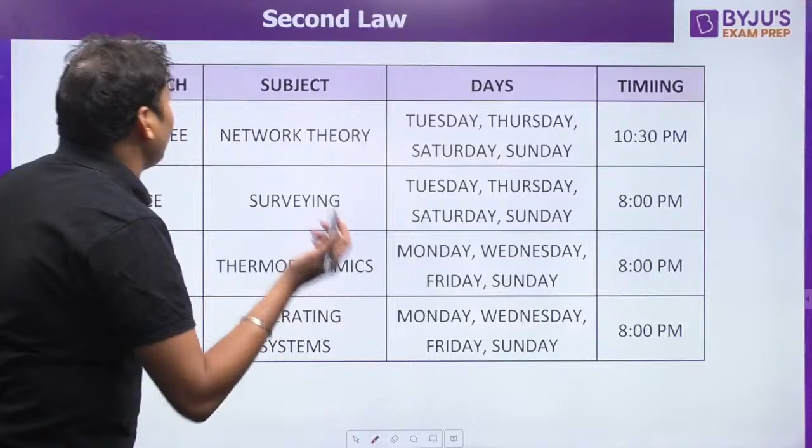All right. So this is our schedule for GATE 2023 aspirants. So for mechanical, the subject thermodynamics is going on, and every alternate day I am meeting live on the YouTube channel at 8 p.m. So next class will be on Wednesday and we will start talking about the entropy.

पूरा syllabus तो यहाँ पे नहीं हो पाएगा, but most of the important topics which are generally coming in GATE examination, these topics we will definitely cover here itself. So we will try to cover almost all the subjects, but in each and every subject we will not be able to provide you the complete syllabus because of the time constraint, but definitely we will be providing you the topics which are frequently asked in your GATE examination. All right.

This is the complete schedule for thermodynamics, basic and applied thermodynamics. So the basics and first law we have already covered. Second law, theoretical portion we have already covered. The next topic will be entropy, and then we will talk about the application of thermodynamics. These 4 topics are the most important in your thermodynamics syllabus, whether it be GATE, IES or other PSU examination like BARC, ISRO. You will find most of the questions coming from these topics only.

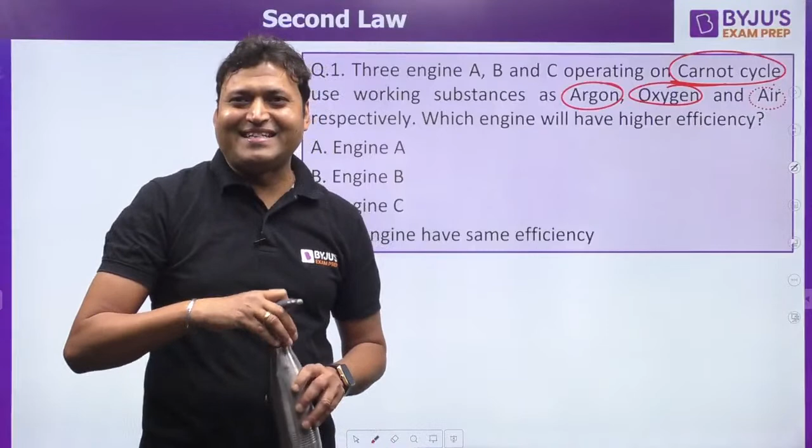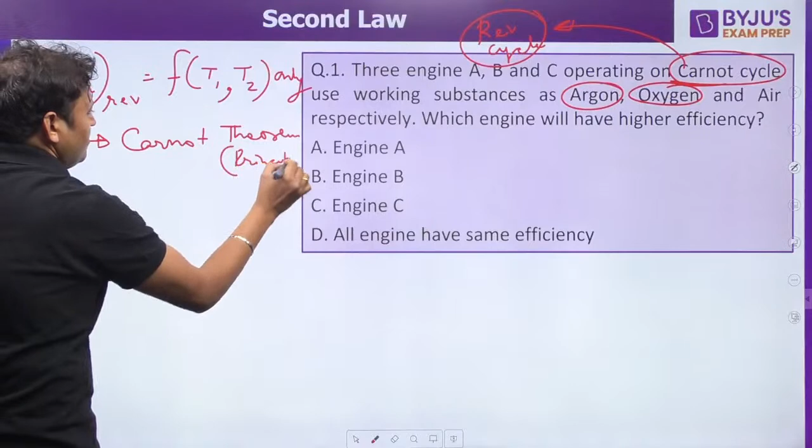Now look, Carnot cycle means a reversible cycle. Carnot is the most efficient reversible cycle. So when the engines are working on a reversible cycle, the thermal efficiency of the reversible cycle is a function of source and sink temperatures only. That is the Carnot theorem or Carnot principle. According to the Carnot principle, for a reversible cycle, thermal efficiency is not a function of the working fluid.

But the actual cycle, if it is an irreversible cycle, then the working fluid also comes into the picture for a real cycle. So the answer to the first question, Varun, it is not A, it is not B, it is not C. The thermal efficiency of all the reversible cycles will remain same, because all are reversible cycles.

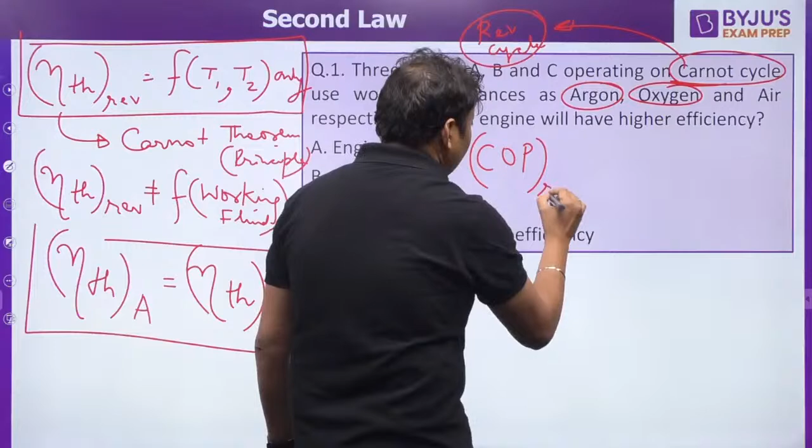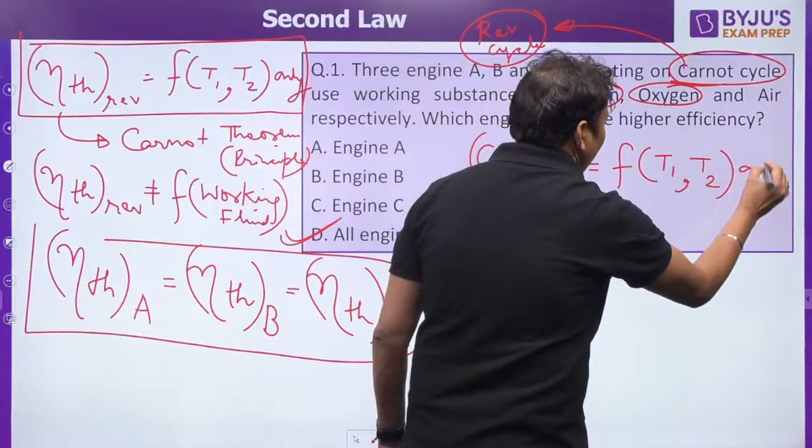And the same concept applies to COP for heat pump and refrigerator also. For a heat pump or a refrigerator, if the cycle is reversible, then COP also varies with the temperature only, whether it be COP or thermal efficiency. For a heat engine, we talk about thermal efficiency because it is a work producing device, and for heat pump and refrigerator, which are work consuming devices, we define COP to be the performance parameter. Is this clear to everyone? Answer to the first question is option D.

The next question, question number 2 on your screen. Read the question and try to solve it. Again, Carnot cycle. Whenever the word Carnot or reverse Carnot, Carnot means reversible. Carnot cycle or reverse Carnot cycle, they are completely reversible cycles. So the Carnot cycle is having an efficiency of 0.75. One more thing, do you know? The efficiency of the Carnot cycle, that means the reversible cycle, is given as 0.75 if the temperature of the high temperature reservoir, that is the source.

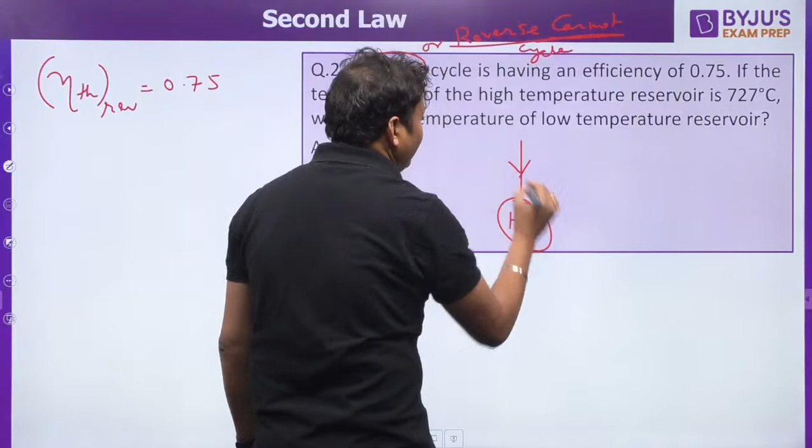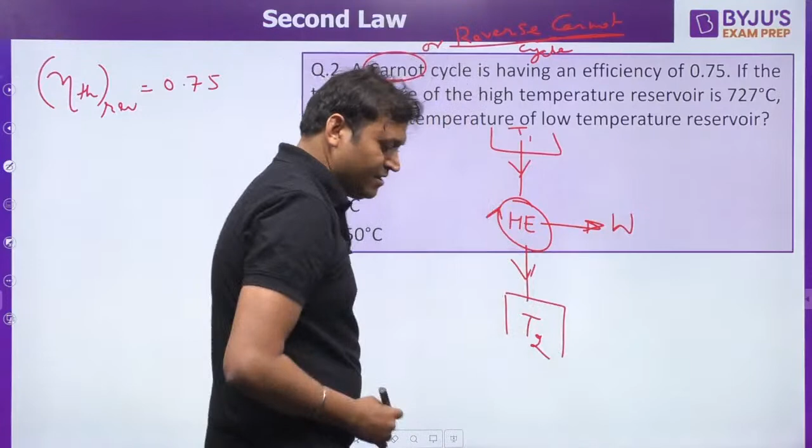How can the heat engine cycle be drawn? That is the heat engine. Here is the high temperature source, and there is a low temperature sink, and it is producing work. Clockwise cycle is the heat engine cycle. So the high temperature reservoir is the source, and the low temperature reservoir is the sink, Q1, Q2 and W. That is how we have drawn the heat engine cycle in yesterday's session. So what is the answer to question number 2? I want everyone to give me the answer.

So thermal efficiency is actually net work output upon heat input. Total heat input is Q1, work output is W, and from the first law of thermodynamics, we can say Q1 is equal to W plus Q2. So we can say W is equal to Q1 minus Q2. That can also be written as Q1 minus Q2 upon Q1, or we can write it as 1 minus Q2 by Q1. And this is the expression for thermal efficiency for all cycles, reversible as well as irreversible.

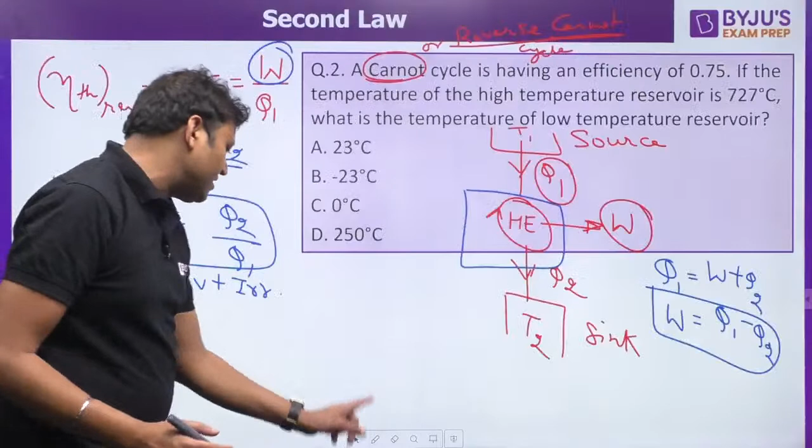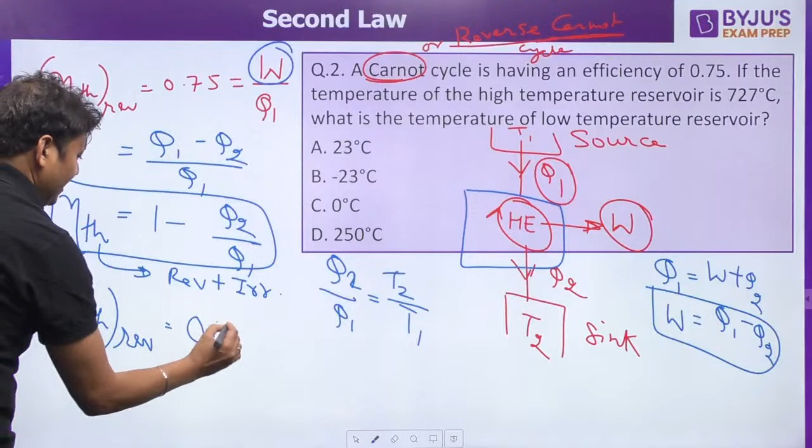But for a reversible cycle, one more concept we have discussed. If it is a reversible cycle, Q2 by Q1 is equal to T2 by T1. So for a reversible cycle, thermal efficiency is given as 0.75. That can be written as T1 minus T2 upon T1. From here, we can find out the temperature of the low temperature reservoir or sink.

The word sink could have also been used. Low temperature reservoir is the sink here, and high temperature reservoir is the source. What is the answer?

Now, one more important thing you should take care of. T1 and T2 must be absolute temperatures. What is absolute temperature? Absolute temperature means the temperature must be in Kelvin. Whenever we talk about the difference of temperature, it does not matter whether you calculate the difference in Kelvin or Celsius.

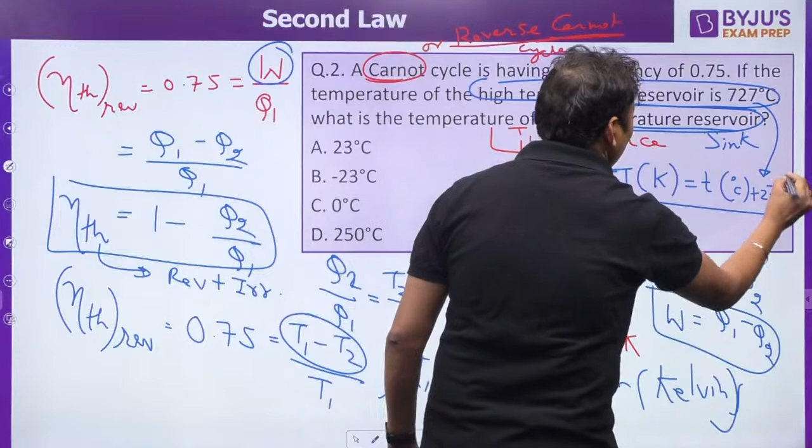The question is to find out T2, the low temperature. So T1 has to be taken in Kelvin. How to convert? Temperature in Kelvin is temperature in degrees Celsius plus 273. If you want to convert degree Celsius temperature into Kelvin, you should add 273. So T1 will be equal to 727 plus 273, that is equal to 1000 Kelvin.

And you can find out: 0.75 is equal to 1 minus T2 by T1, that is 1000. T2 you will get in Kelvin, and to convert it into degree Celsius, temperature in degree Celsius is equal to the temperature in Kelvin minus 273. That is how you will get the answer. What is the correct answer?

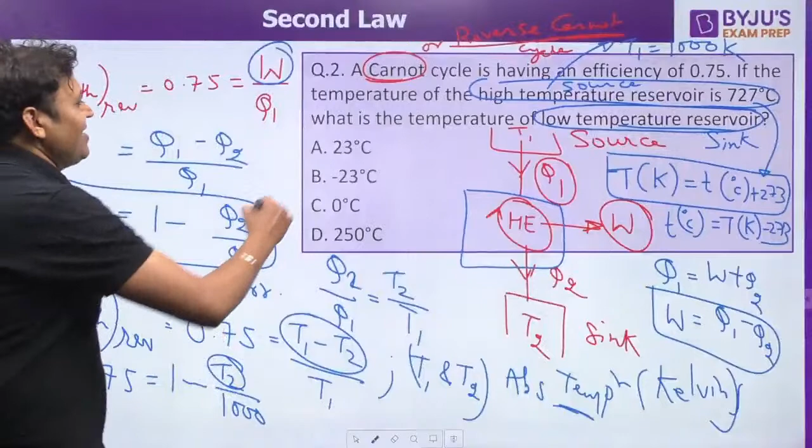The correct answer is option B. Yes, great. Is this clear to everyone? The next question for you guys.

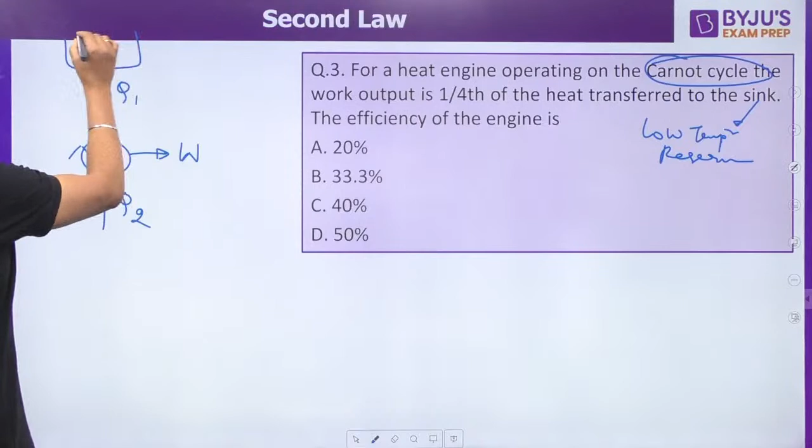For a heat engine operating on the Carnot cycle, the work output is 1/4 of the heat transferred to the sink. Sink is the low temperature reservoir. So if we draw the Carnot cycle, this is Q1, heat rejected is Q2, and the work output is W. This is the heat engine cycle. High temperature reservoir is the source, low temperature reservoir is the sink.

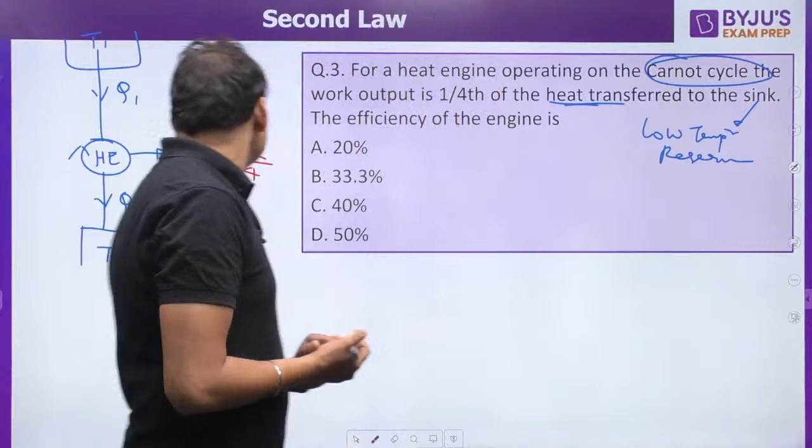So the work output is 1/4 of the heat transferred to the sink. This is the statement. So W is equal to Q2 by 4, isn't it? It is not Q1 by 4. And what is Q1? From the first law of thermodynamics, Q1 will be equal to W plus Q2. That is the energy conservation law for the system: energy in is equal to energy out, because it is a thermodynamic cycle. So Q1 will be equal to Q2 by 4 plus Q2, that is 5 by 4 Q2.

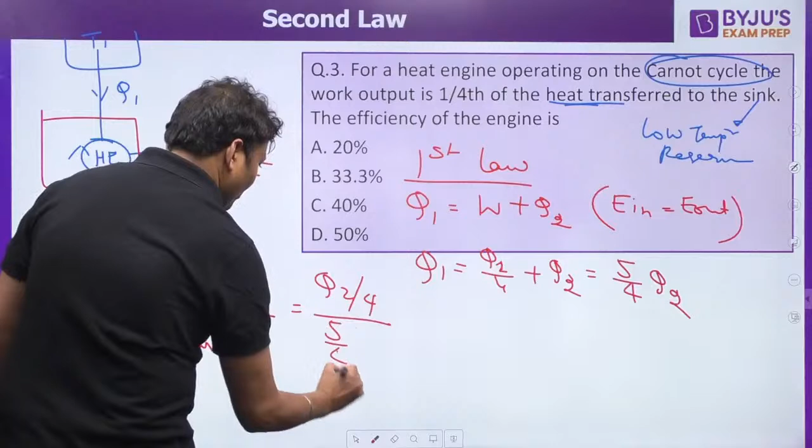Put the value. The thermal efficiency, whether it is a reversible or irreversible cycle, is given by the net work output upon total heat input. So W is Q2 by 4 and Q1 is equal to 5 by 4 Q2. So it will be 1 by 5, that is 20%. A is the right answer.

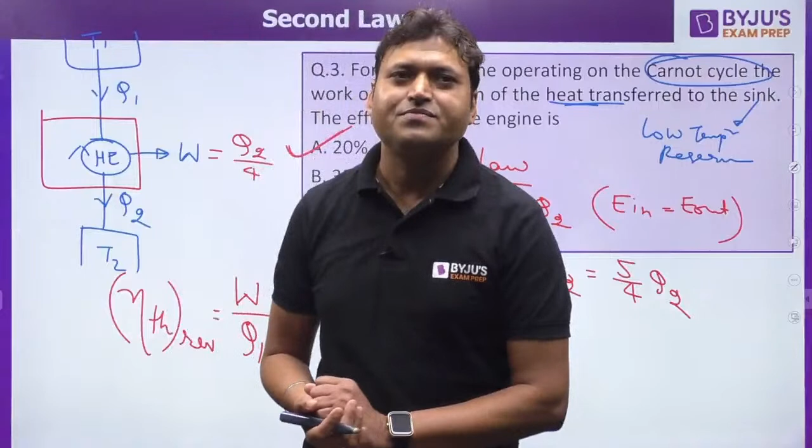Yes. Others, Ashish, yes. Others have not responded except Sagnik. Yes, Ashish. Hi, Abhishek. What's up?

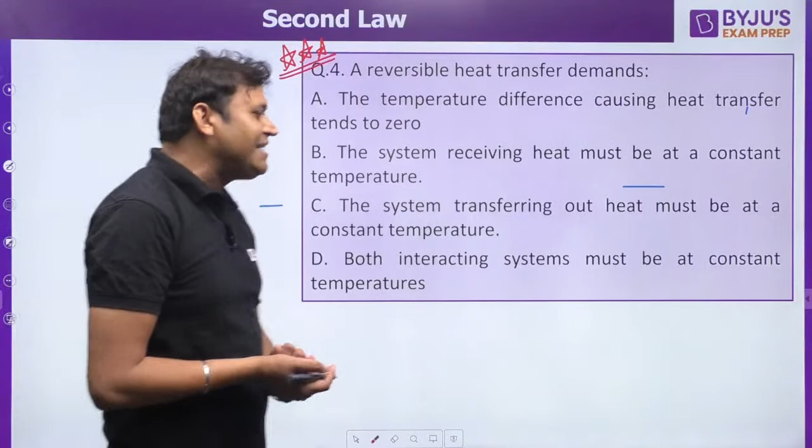Let us move to the next one. Question number 4. This is a very beautiful and important question, on the basic concept, whether you are clear with the basic understanding or not. Can you let me know the answer to this one? A reversible heat transfer demands. Do you know that the heat transfer process is an irreversible process? Heat transfer is irreversible.

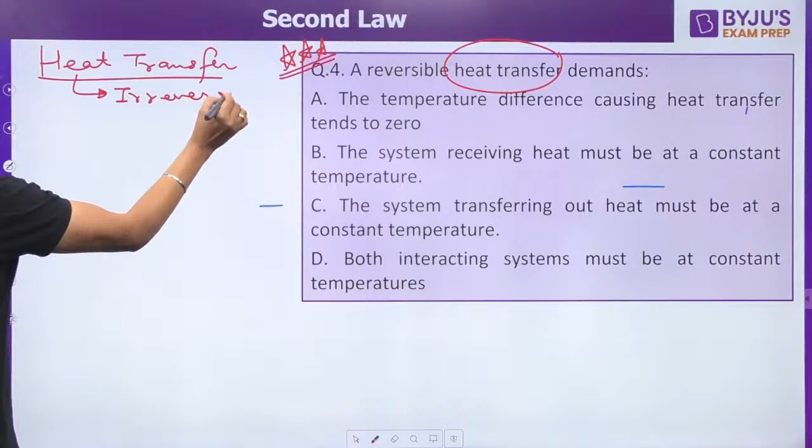Because why is heat transfer irreversible? Because heat always flows from high temperature to low temperature without any external work. If T1 is greater than T2, the direction of heat flow will be from 1 to 2. And if we want the heat to flow from low temperature to high temperature, we need to do external work.

If we want the heat to flow from low temperature to high temperature, then we are supposed to do some external work. Then external work needs to be done. That is why the process is not a reversible process. But in our Carnot cycle, the heat transfer is a reversible process. How does the heat transfer become a reversible process?

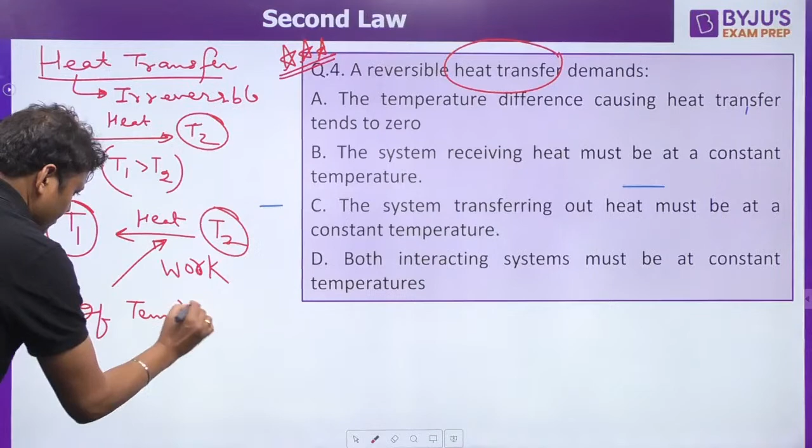If the temperature difference is infinitesimally small, or the temperature gradient is infinitely small, then the heat transfer becomes a reversible process.

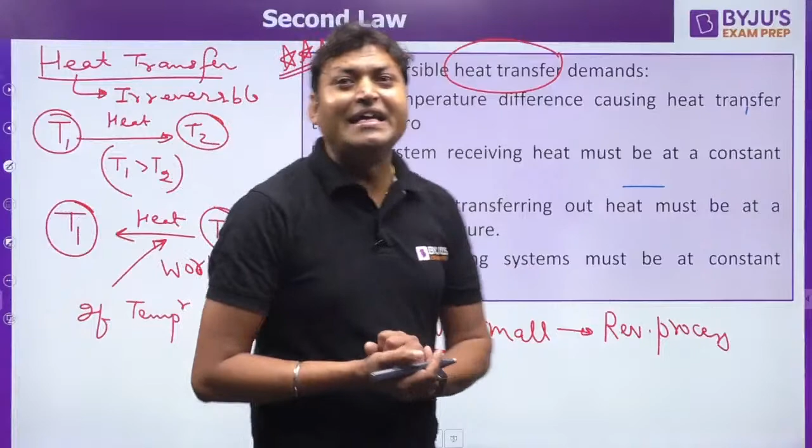For example, in a heater or in a geyser, a water heater. If we talk about a water heater, there is water and there is a heating coil. The temperature of the heating coil is almost the same as the temperature of the water. If the temperature of the heating coil is slightly higher than the temperature of water, the heat will flow from the heating coil to the water. Then the temperature of water becomes equal to the temperature of the coil.

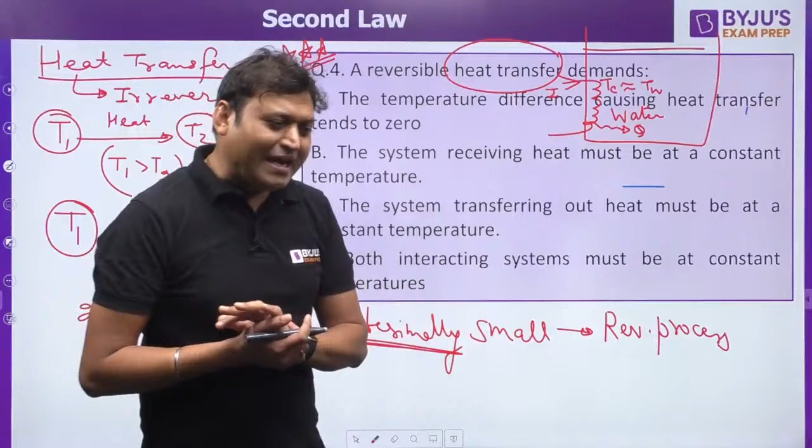Then the temperature of the coil further increases because of the current flow, and there is a minute temperature difference between the coil and the water. That is why there is a heat flow. For the heat to flow, there must be a temperature difference. But if the temperature difference between the two systems is very, very small, then the process can be treated as reversible heat transfer.

So option A is more appropriate. What is the problem with option B and C? Why are they not correct? Option B: the system receiving heat must be at a constant temperature. No, it is not true. If the water is at 20 degrees Celsius, slowly but steadily the temperature of water will keep on rising because of the current flow. The current flow will generate heat in the heating coil, and the heating coil will transfer heat to the water. The temperature will keep on increasing.

The system receiving heat at constant temperature means there is a phase change in the fluid; then the temperature of the system remains constant. When heat is transferred for the phase change, the temperature of the system will not change. But in that case, the heat transfer process will be irreversible, isn't it? The phase change of the system does not make the process reversible. Getting my point? So the second one is not the correct answer.

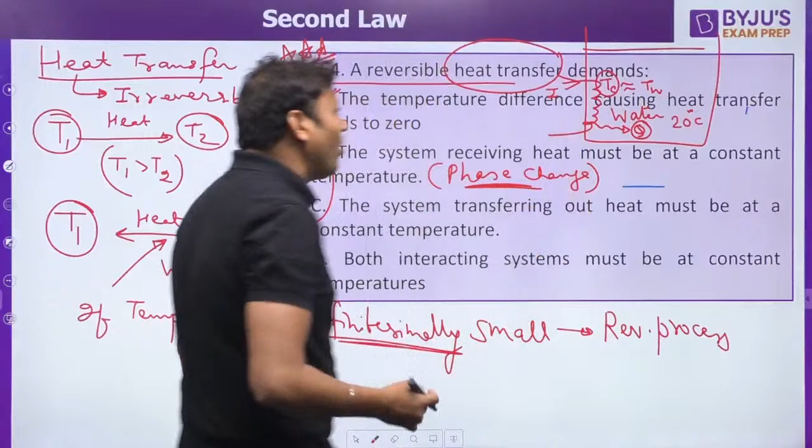Similarly, the system transferring out heat must be at a constant temperature. That is also not true. The temperature of the heating coil is also not constant. It will keep on increasing, and the water temperature will also keep on increasing. The third statement is possible when there is a phase change in the surrounding. But that does not make the heat flow a reversible process.

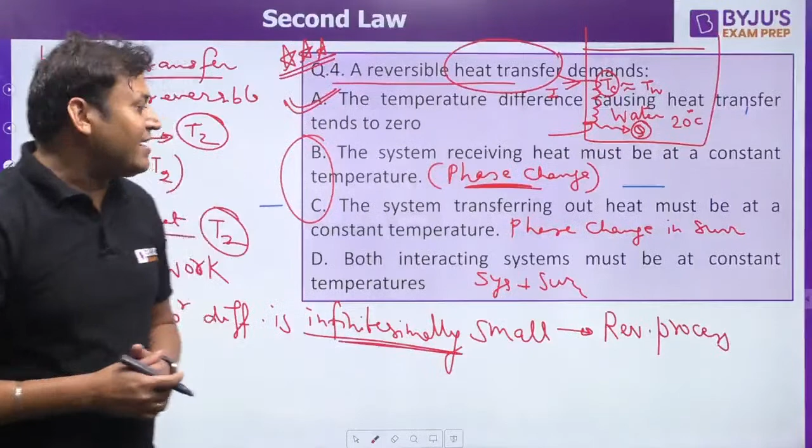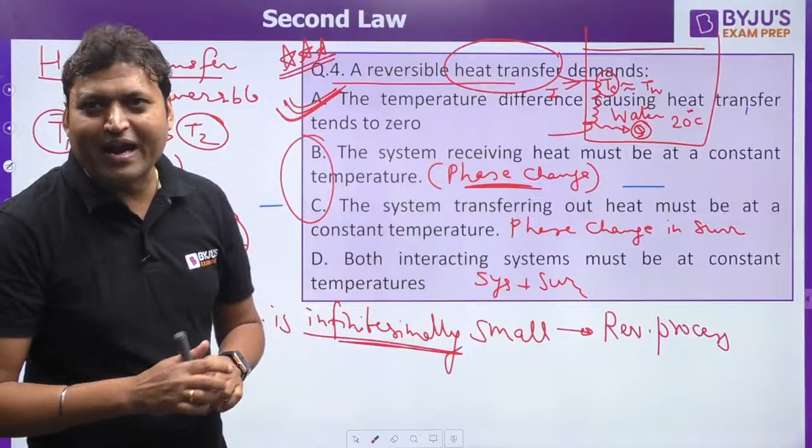If both the interacting systems, system and surrounding, must be at constant temperature, there is a phase change in both: the system receiving heat as well as the system supplying heat. Then option D can be true, but that does not make the process reversible. So that is why option A is correct. To make the heat flow process reversible, the temperature difference between the two systems should be infinitesimally small. All right? Is it clear?

Question number 5 is very, very simple. Ashish, is this clear to you? Question number 4. What is the answer to question number 5?

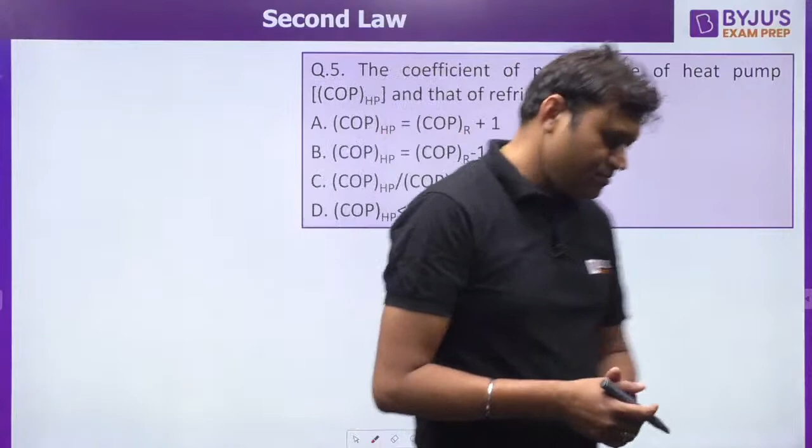Do you know, for the same value of Q1 and Q2, the heat addition and heat rejection, we can say the COP of a heat pump will be equal to the inverse of the thermal efficiency of a heat engine.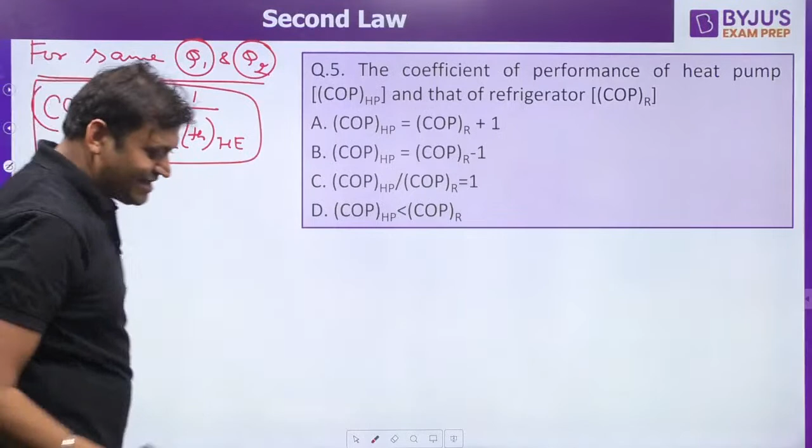COP of heat pump is reciprocal of thermal efficiency of heat engine, and also COP for heat pump is equal to 1 plus COP for refrigerator. These are true when Q1 and Q2 are same.

Similarly, for a reversible cycle, if T1 and T2 are same, thus source and sink temperature are same, the high temperature reservoir and the low temperature reservoir are having the same temperature, then also COP for reversible heat pump will be equal to 1 upon thermal efficiency of reversible heat engine, and COP for reversible heat pump is equal to 1 plus COP for reversible refrigerator.

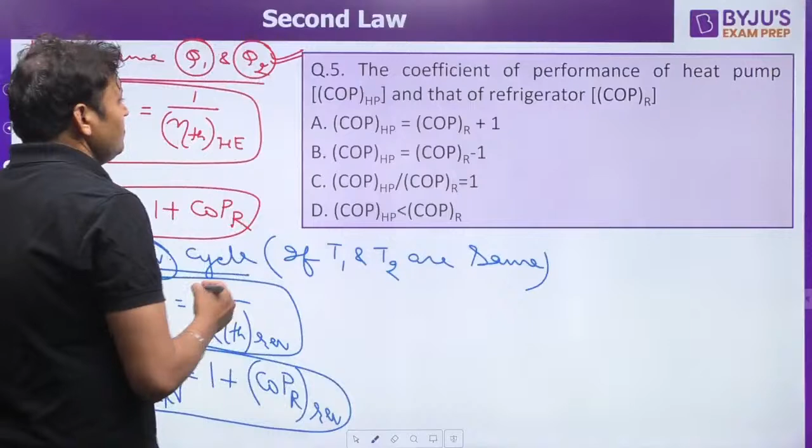These relationships are always true, but the condition is that the heat supplied and heat rejection must be same, or even if the temperature limits T1 and T2 are same, then for a reversible cycle we can have the same type of relationship. What is the correct answer? Option A. Isn't it option A? It is not mentioned, so we can assume the constant values of heat transfer.

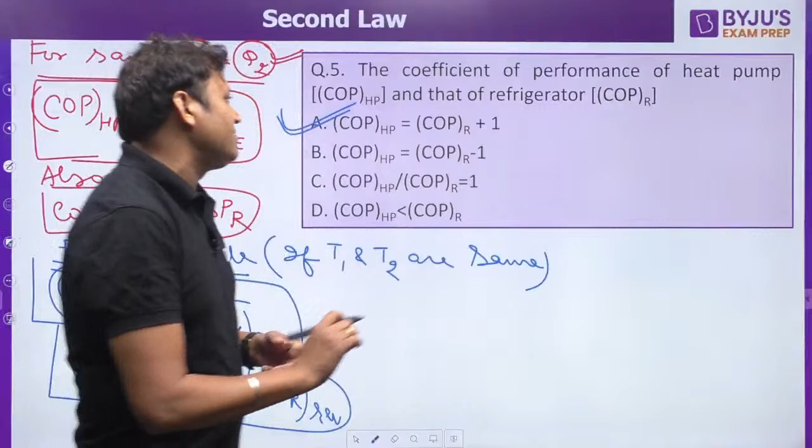Option A. Can you just let me know what is the maximum thermal efficiency of a heat engine? Can it be 1? A heat engine can have thermal efficiency as 100% or not? Which heat engine is having 100% thermal efficiency?

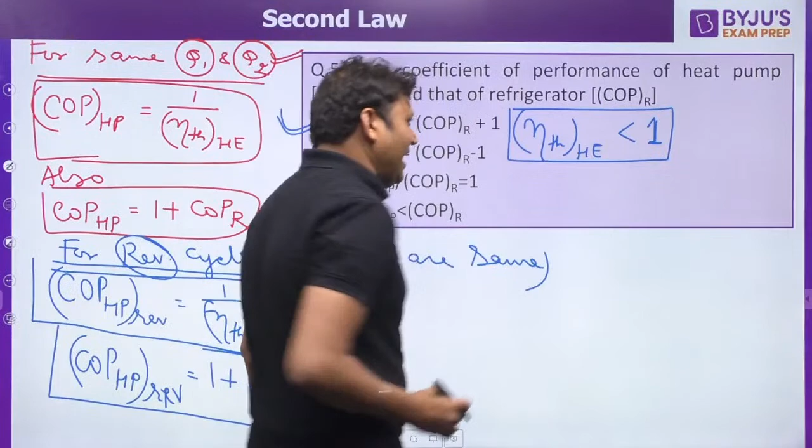According to Kelvin-Planck statement, thermal efficiency is always less than 1, always less than 100%. What is the thermal efficiency? That is W upon Q1, and W must always be less than Q1. W cannot be equal to Q1.

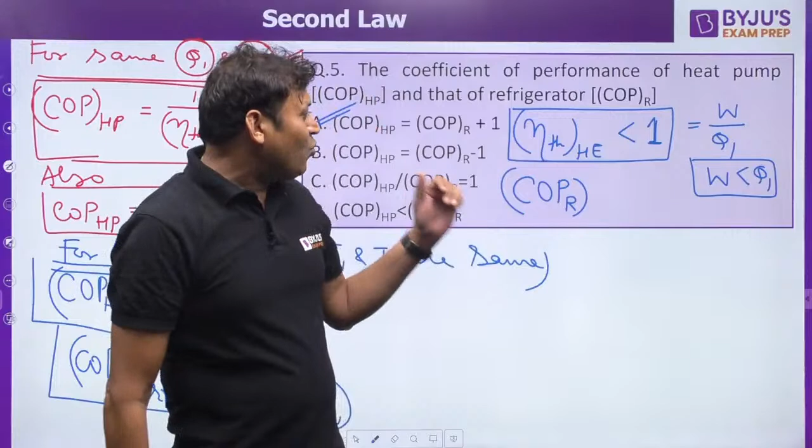Why? Because it is impossible to develop a cyclic device which converts the low grade energy into high grade energy completely. That is Kelvin-Planck statement. So the work output W cannot be equal to Q1. Otherwise, it will violate the Kelvin-Planck statement of second law of thermodynamics.

But COP for a refrigerator can be less than, equal to, or greater than 1. What is COP for a refrigerator? Desired output is Q2 divided by net work input, Q2 by W. I had told you in the last class also, if we talk about the refrigerator, there is a possibility that Q2 is equal to W. So the COP will be equal to 1.

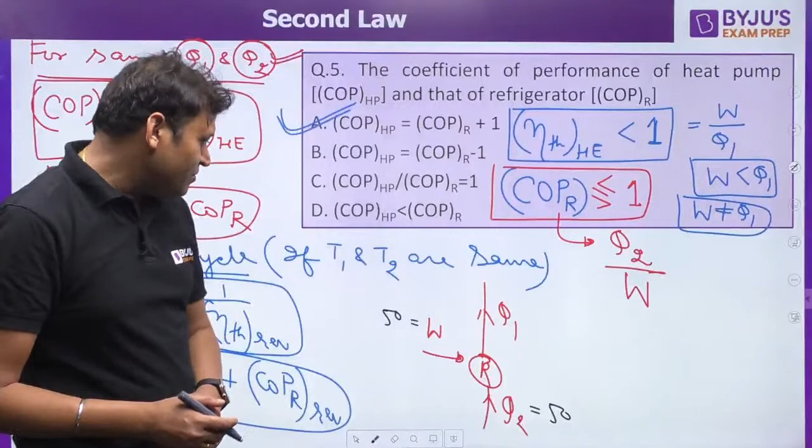Q2 can be equal to W, as well as it can be 40, it can be 60. So Q2 can be less than, equal to, or greater than W. That is why COP for a refrigerator can be less than, equal to, or greater than 1. What about COP for a heat pump?

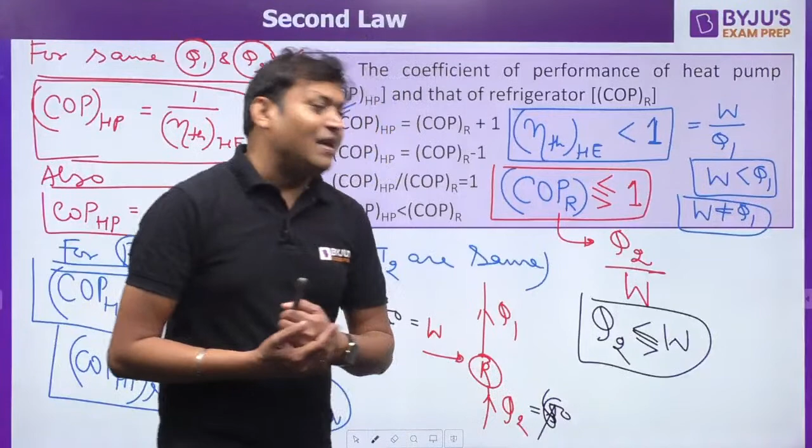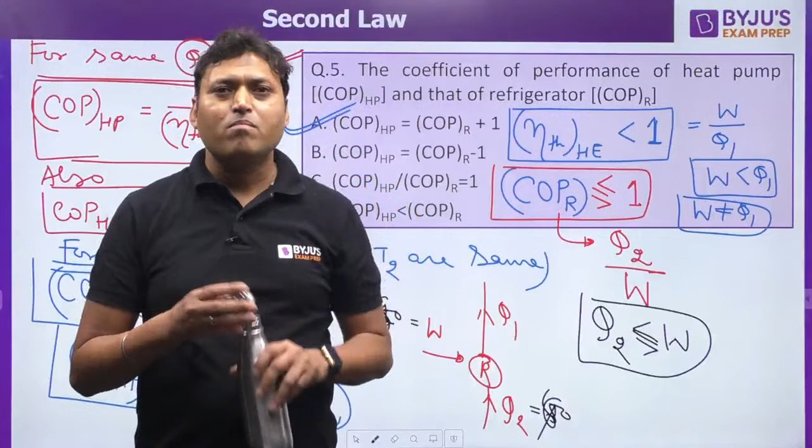What about COP for a heat pump? Can COP be less than 1, or equal to 1? Can the COP of a heat pump be less than 1 or equal to 1? Is it possible? I am waiting for your response. Quickly.

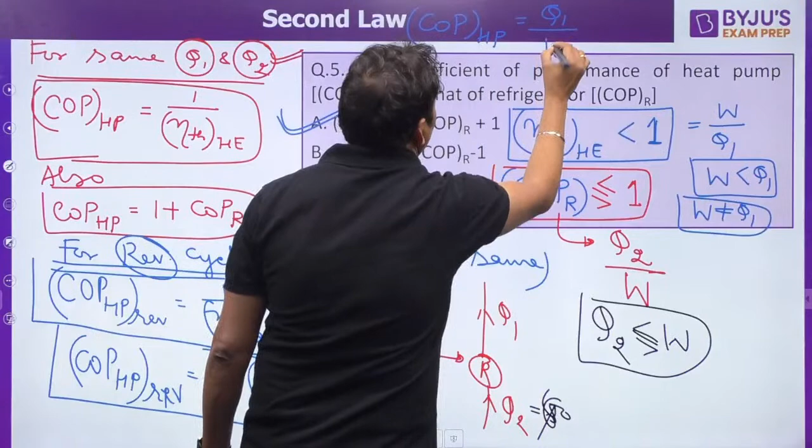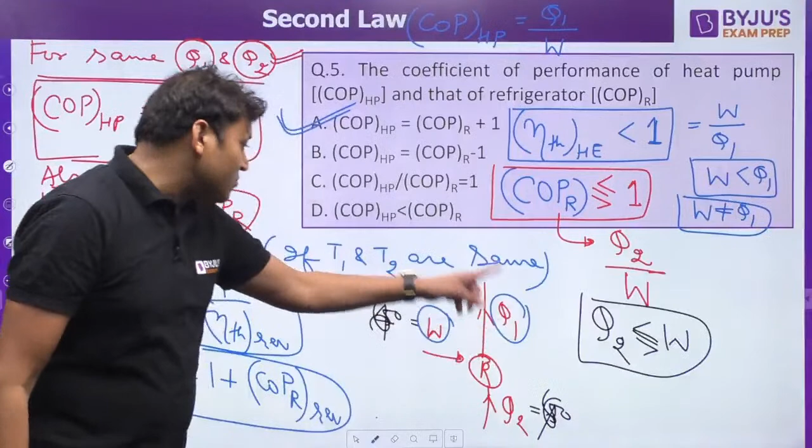What is COP for a heat pump? Desired output is Q1 and work input is W. Q1 by W is COP for a heat pump. Now, if we talk about relation between Q1 and W, Q1 will always be greater than W, isn't it?

Because from the first law of thermodynamics, whether it be heat pump or refrigerator, we know that Q1 is equal to Q2 plus W. So Q1 will be greater than W. Q1 cannot be less than W. The total energy entering into the system should be equal to total energy leaving from the system.

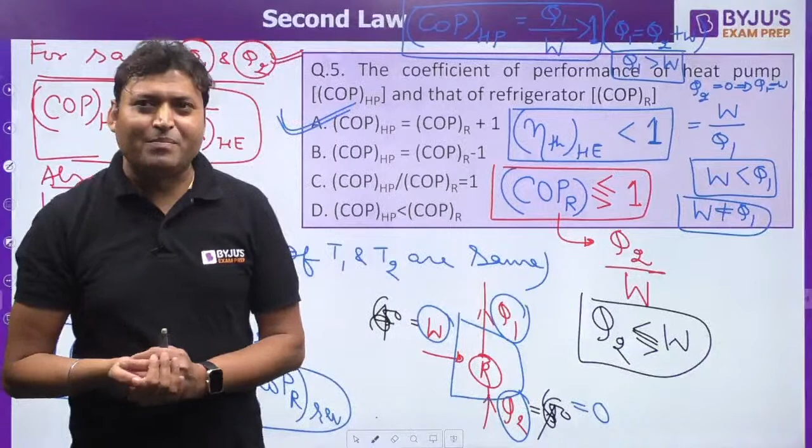So Q1 will always be greater than W, and that is why COP for a heat pump is always greater than 1. It cannot be less than 1, even it can be equal to 1. Why? Because if Q2 becomes 0, then Q1 becomes equal to W. But in that case, sorry, is it possible to be 1? Can it be possible to have the COP for a heat pump 1?

Please do let me know.

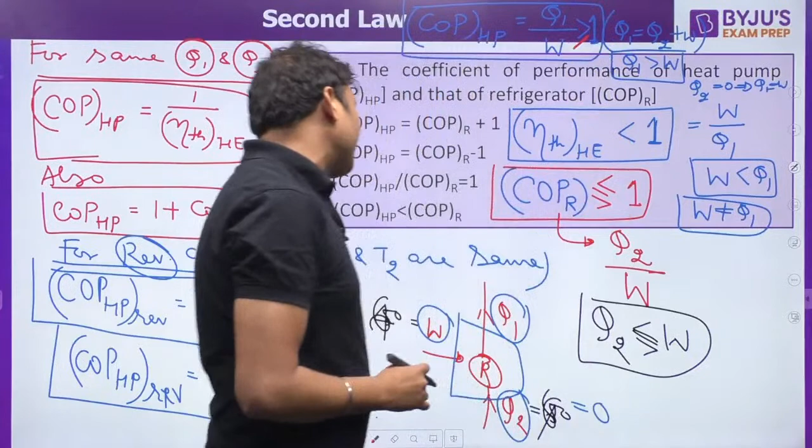For a heat pump, it can be equal to 1 also. Why? Because work is a high grade energy, high quality energy, and heat is the low quality energy. So the complete conversion of high grade energy into low grade energy is still possible in a thermodynamic cycle, but the reverse is impossible. The complete conversion of low grade energy into high grade energy is impossible, but the complete conversion of high grade energy into low grade energy is possible.

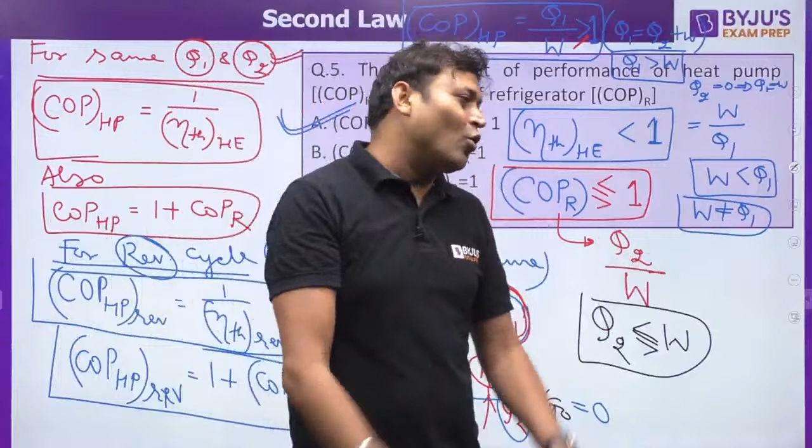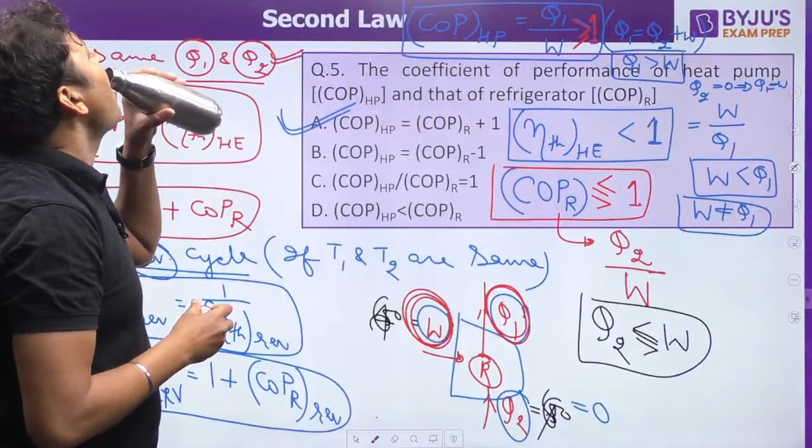That is why the COP for a heat pump can be equal to 1, can be greater than 1. Right? Can the COP be infinite? Can there be a possibility to have COP infinite?

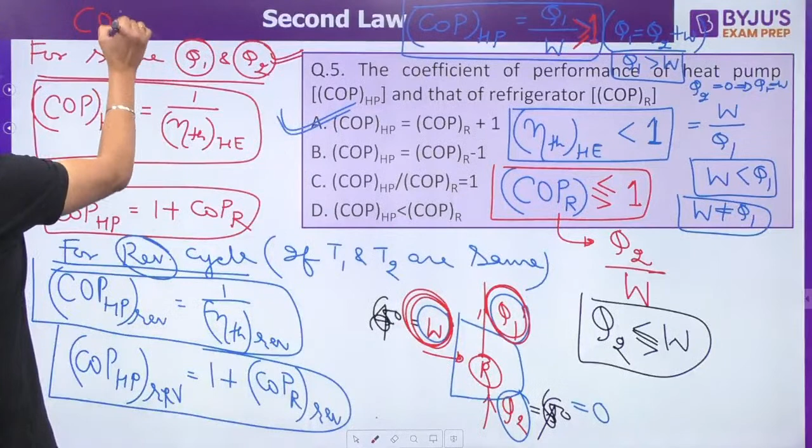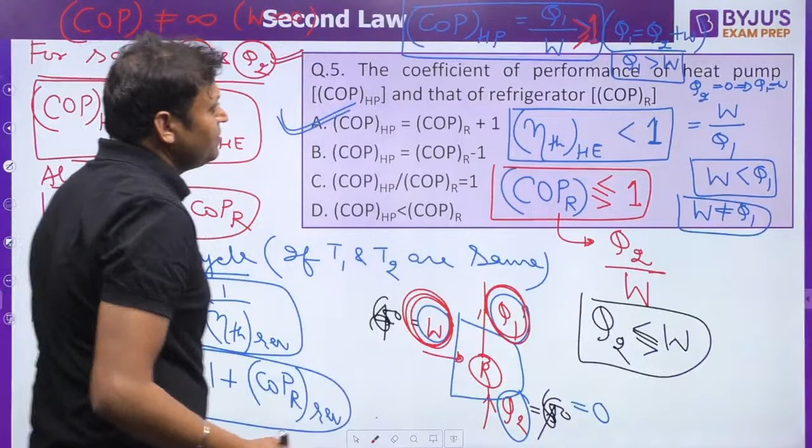COP cannot be infinite. Why? For COP to be infinite, W must be 0. The denominator must be 0. And if W is equal to 0, then the heat cannot flow from low temperature reservoir to high temperature reservoir without any external work. So if a device is having COP infinite, then it will violate the Clausius statement of second law of thermodynamics.

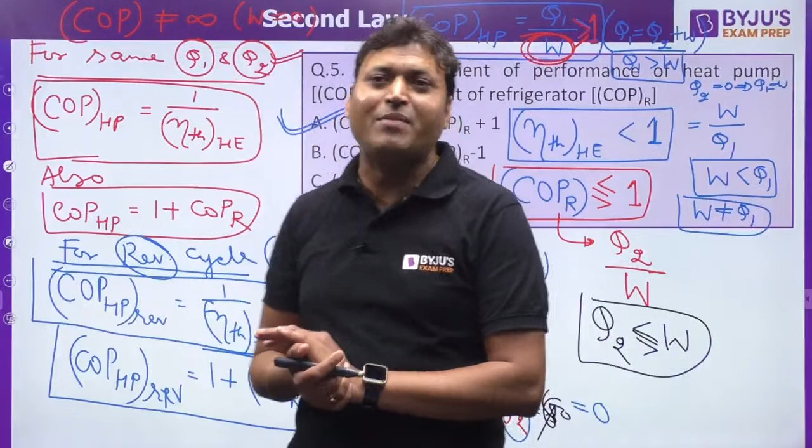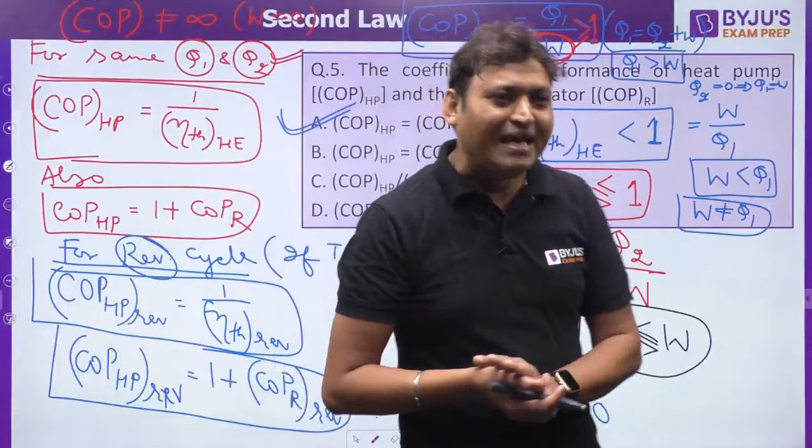What is the Clausius statement of second law? It says that to make the heat to flow from low temperature reservoir to high temperature reservoir, the external work must be done on the system. That is why COP cannot be infinite. But yes, COP for refrigerator can be 0, and that will make COP for heat pump to be 1.

COP for refrigerator can be 0. Q2 can be 0. There is a possibility to have Q2 to be 0. Is this clear to everyone? Anybody having any doubt, you can just let me know.

Now the next question, question number 6 on your screen. A condenser of a refrigeration system rejects heat at the rate of 120 kilowatt while its compressor consumes a power of 30 kilowatt. If we draw the refrigeration cycle, I had drawn yesterday also. There is a compressor. Then the working fluid enters into condenser. Then there is an expansion valve and there is a boiler.

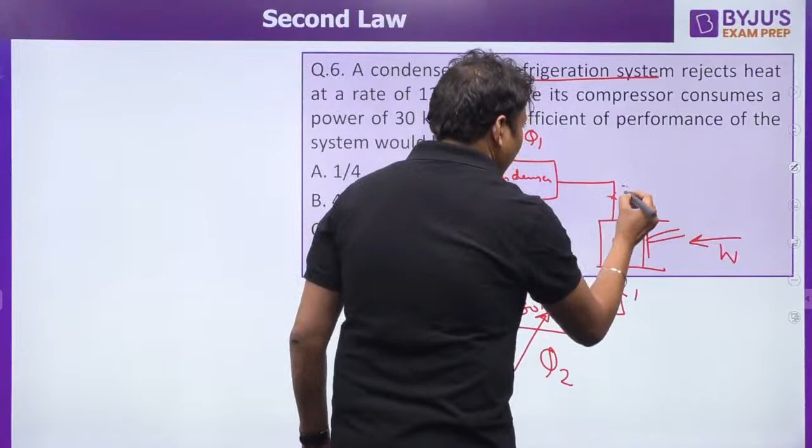This is the schematic diagram. Work input W is given in the compressor, and the condenser rejects heat Q1 to the surrounding and the boiler takes the heat. This is the thermodynamic cycle: point 1, then 2, then 3 and then 4. And if we draw this diagram, this is the refrigerator, Q1, then Q2, and this is the storage space. And there is a Q in, W in.

This is T1, the environment. I told you this is the source here and this is the sink. High temperature reservoir is the sink, low temperature reservoir is the source. What is the answer to this question? If you read the question carefully, a condenser of a refrigeration system rejects heat at a rate of 120 kilowatt. The condenser is rejecting heat to the environment, that is 120 kilowatt.

And the boiler is taking the heat from the storage space. That is how the refrigerator works. While its compressor consumes a power of 30 kilowatt, W is equal to 30. So what is Q2? From the first law, energy conservation applied to the system, Q2 has to be 90 kilowatt, isn't it? The COP for the refrigerator is equal to desired output Q2 upon work input.

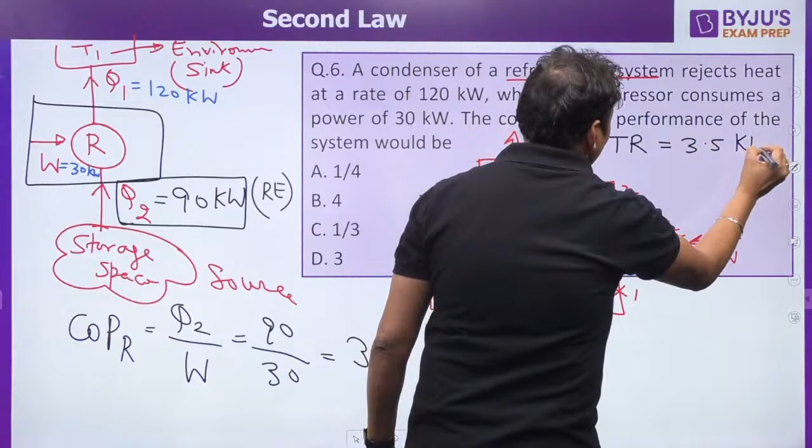So that is the refrigeration effect. The question can be to find out the refrigeration effect in terms of ton of refrigeration. So Q2 by W, that is 90 divided by 30, the COP will be equal to 3. And 1 ton of refrigeration, 1 TR, is 3.5 kilowatt. So we can convert this Q2 in terms of ton of refrigeration as well. Do you remember this? 1 TR is equal to 3.5 kilowatt.

The next question, question number 7. Everyone, please give it a try. A Carnot heat pump, Carnot means reversible, works between 27 degrees Celsius and 327 degrees Celsius. This is 327 degrees Celsius, and this is 27 degrees Celsius. This is our desired effect, Q1. This is Q2 and this is W.

What will be its COP? COP for heat pump, and if it is reversible, that can be written as desired output upon work input, or we can say Q1 by Q1 minus Q2, or we can write it as T1 upon T1 minus T2. What is the answer to question number 7? Question number 7. Yes.

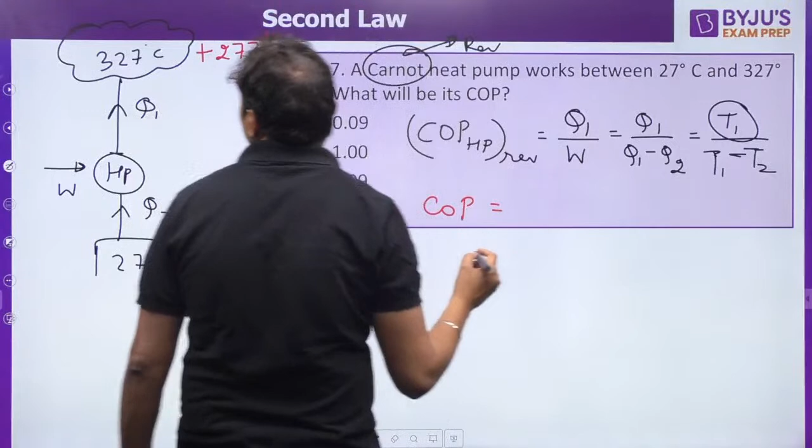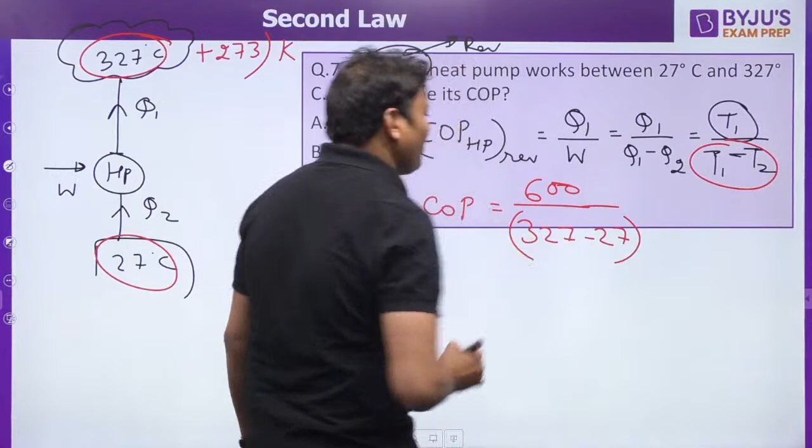So T1 is what? T1 is 327 degrees Celsius. You need to convert it into Kelvin, plus 273 Kelvin. So COP is equal to 600 upon, when we talk about the difference, I told you, you can take the difference in Kelvin or degree Celsius, it will not create a problem. So 327 minus 27, that will be the temperature difference. So 600 upon 300 will be the COP. The answer will be 2.

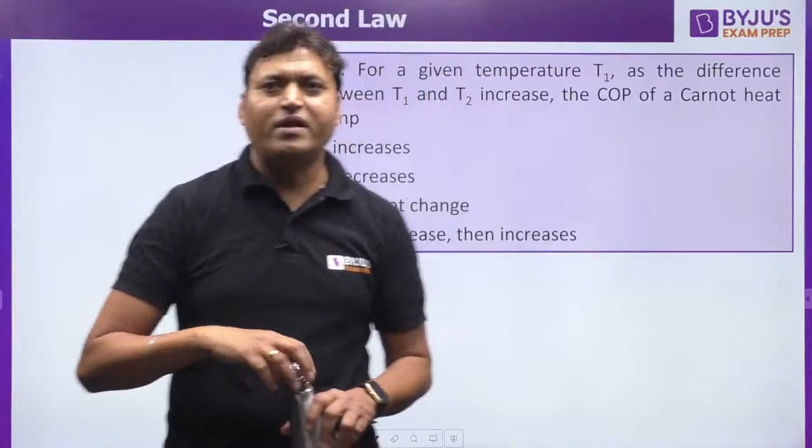The COP for Carnot heat pump will be 2. Because it is Carnot heat pump, it means it is a reversible heat pump. That is why the COP will be 2. The next question. Next one. For a given temperature T1, the difference between T1 and T2 increases. The COP of Carnot heat pump.

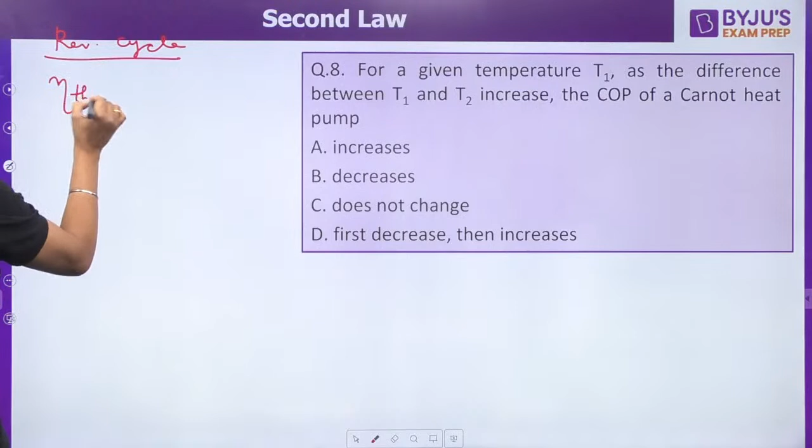Look, the thermal efficiency, I am talking about reversible cycle. The thermal efficiency is given by 1 minus T2 by T1, or we can say T1 minus T2 upon T1. That is the thermal efficiency. So as the temperature difference T1 minus T2 increases, the thermal efficiency of reversible cycle also increases, isn't it? As long as the temperature difference increases between the source and the sink, the thermal efficiency

will also increase. And we also know that the COP for a reversible heat pump is 1 upon thermal efficiency of a reversible cycle. So because COP is inversely proportional to the thermal efficiency, that is why COP of heat pump will decrease. As the temperature difference increases, the COP will decrease.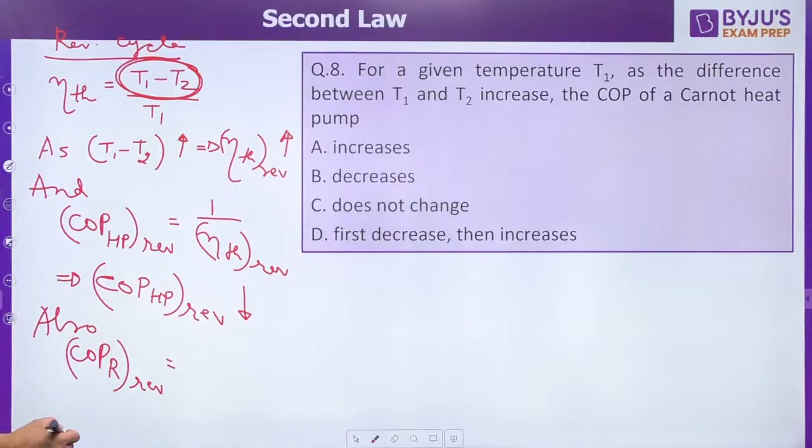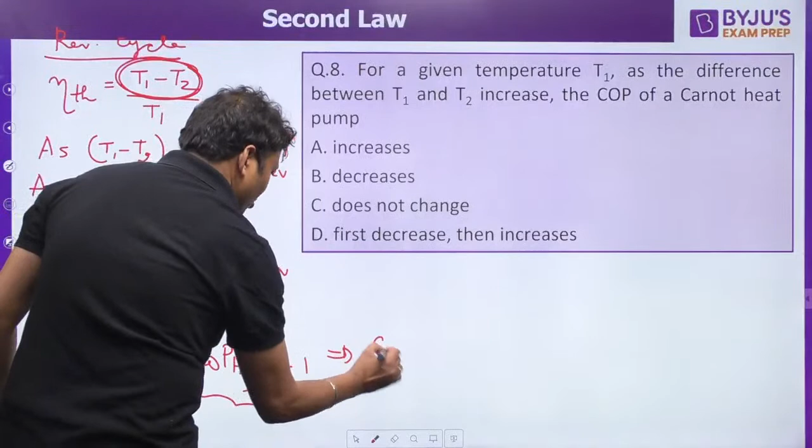And also COP for reversible refrigerator can be written as COP for reversible heat pump minus 1. If the COP of heat pump decreases, then we can say COP for refrigerator also decreases. So by increasing the temperature difference between source and sink, the thermal efficiency will increase, but at the same time the COP will decrease. So the answer to this question is option B.

Is this clear? Is this all clear? Yes, Ashish. Option B, Sagnik. Good, good, good.

Question number 9. The next one. A Carnot engine rejects 50% of the heat absorbed from a source. If we draw the engine, this is Q1, this is heat engine, and heat rejected is Q2, and there is a work output W. A Carnot engine rejects 50% of the heat absorbed from a source to a sink at 27 degrees Celsius. What will be the source temperature in degrees Celsius?

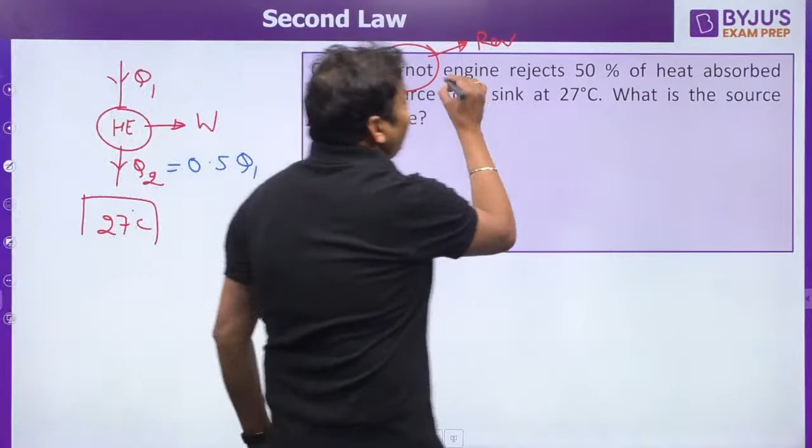So Q2 is equal to 0.5 Q1 according to the given condition. It rejects 50% of the heat, and work output will also be the remaining 50%. So, sorry, not COP, we are talking about the thermal efficiency, will be equal to W work output upon heat input Q1. So that is equal to 0.5 Q1 by Q1. And that can also be written as 1 minus T2 by T1.

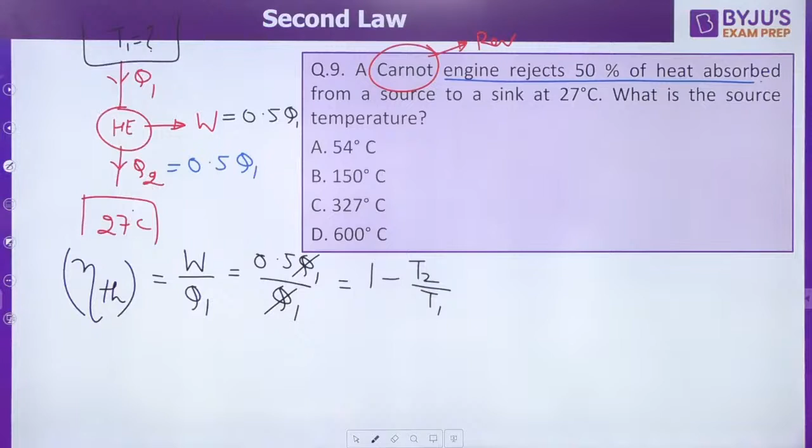So the question is to find out the value of T1, temperature of the high temperature reservoir. So from here you can find out T2 by T1 is equal to 1 minus 0.5 and T1 is equal to T2 by 0.5. What is T2? First of all, convert it into Kelvin. So that is 300. So 300 divided by 0.5, that is equal to 600 Kelvin.

The value of T1 is equal to 600 Kelvin, and 600 minus 273 will be the value of temperature T1 in degrees Celsius. What is the answer for question number 9? Are you getting option C? C is the correct answer, 327 degrees Celsius. That is how the questions can be framed and solved. The next question on your screen, question number 10. We will be having 2 more questions.

A heat pump working on a reverse Carnot cycle has a COP of 5. This is a beautiful question. Let me know your answer to this question. Everyone, please do let me know your answer to this one.

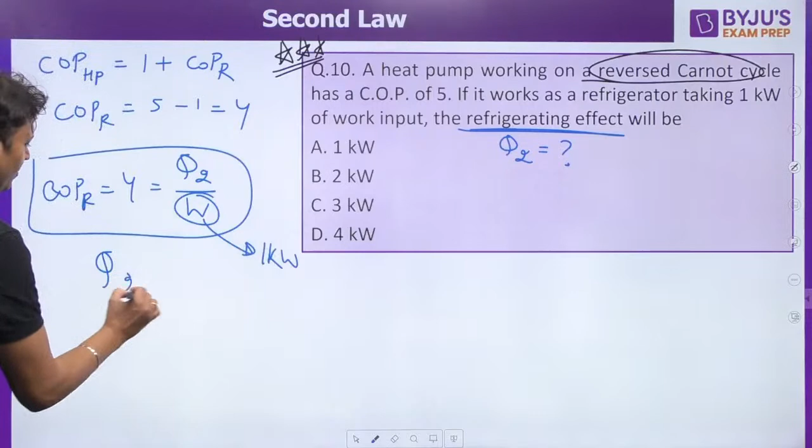If it works as a refrigerator, taking 1 kilowatt of work input, for W to be 1 kilowatt, what is Q2? Q2 becomes 4 kilowatt. Option D. D is the correct answer. Yes, Sagnik. Option D.

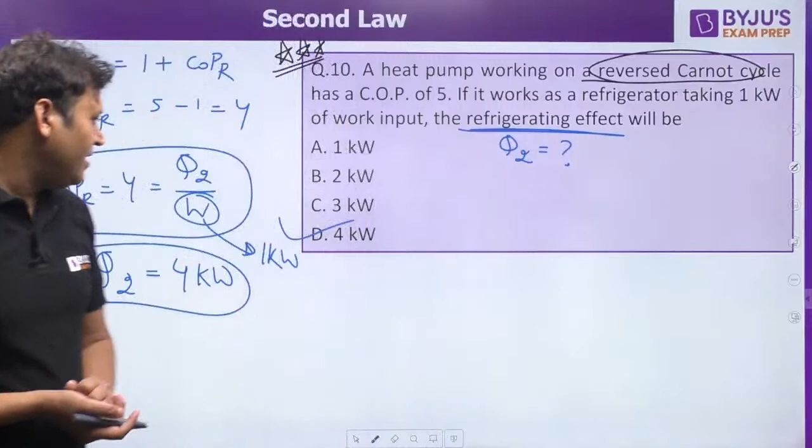The next one, question number 11. That is also simple. T2 by T1 is how much? The ratio of minimum to maximum temperature, a reverse Carnot cycle working as a heat pump. COP for a heat pump, if it is reversible, then we can say Q1 by W, that is Q1 upon Q1 minus Q2, or we can write it as T1 upon T1 minus T2. So if COP is 7, then the thermal efficiency will be 1 by 7. We can have the thermal efficiency, or we can use this expression only.

So 7 is equal to T1 upon T1 minus T2, or 1 by 7 is equal to T1 minus T2 by T1, or that is equal to 1 minus T2 by T1. The question is to find out T2 by T1. So T2 by T1 is equal to 1 minus 1 by 7. 6 by 7 will be the answer. The ratio of T2 by T1 will be 6 by 7. Question number 11, C is the correct answer.

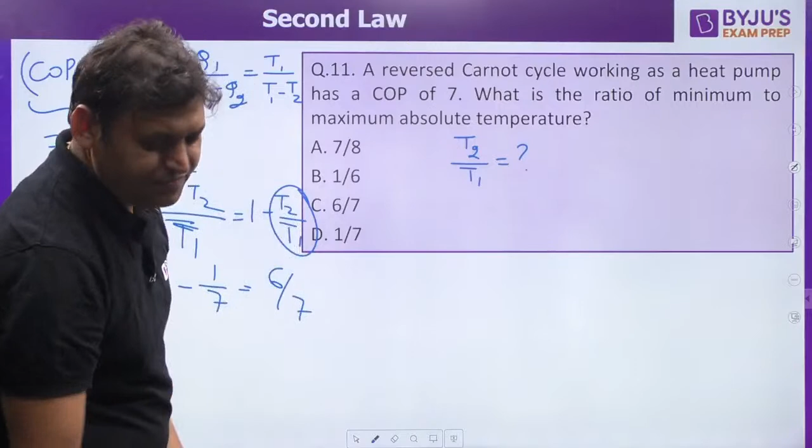Question number 12. The efficiency of a Carnot engine is given as 0.75. If the cycle direction is reversed, what will be the value of COP for the Carnot refrigerator? Again, very simple question. So COP for heat pump, you need to find out first. Reversible is equal to 1 upon thermal efficiency of reversible cycle. That is 1 upon 0.75, that is 4 by 3.

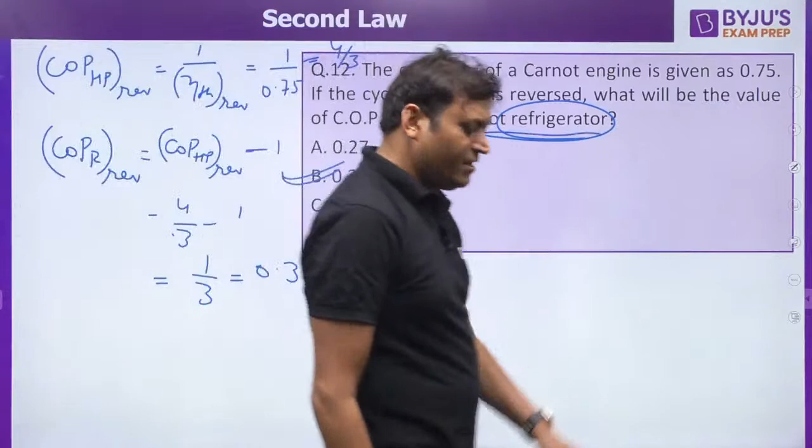And COP for refrigerator reversible is equal to COP for reversible heat pump minus 1. That is 4 by 3 minus 1, that is 1 by 3, or 0.33 will be the answer. It is a Carnot refrigerator. If the question would have been to find out the COP for a heat pump, then your answer would have been 4 by 3. But it is for a refrigerator, so your answer will be 0.33.

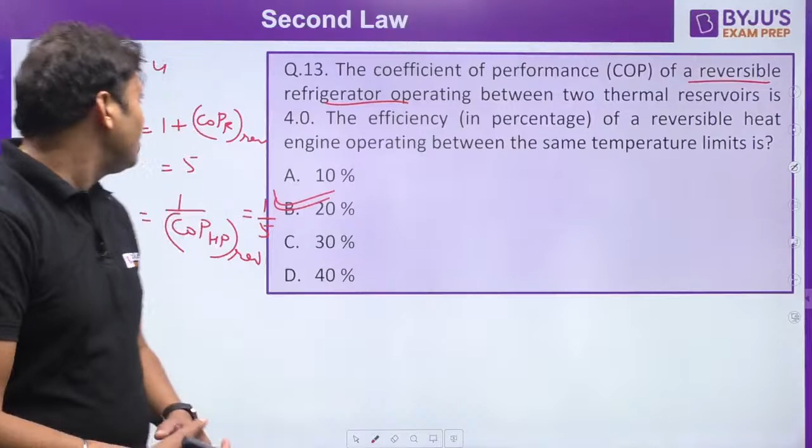Again, the question is based on the similar type of concept. The COP of a reversible refrigerator operating between two thermal reservoirs is 4. So we can find out COP for reversible heat pump, that is 1 plus COP for refrigerator, that is 5. So the thermal efficiency of a reversible heat engine will be 1 upon COP for a reversible heat pump. That is 1 by 5, 20%. Question number 13, 20 will be the answer.

And I am giving you one question for assignment. Just give this question a try and do solve it.

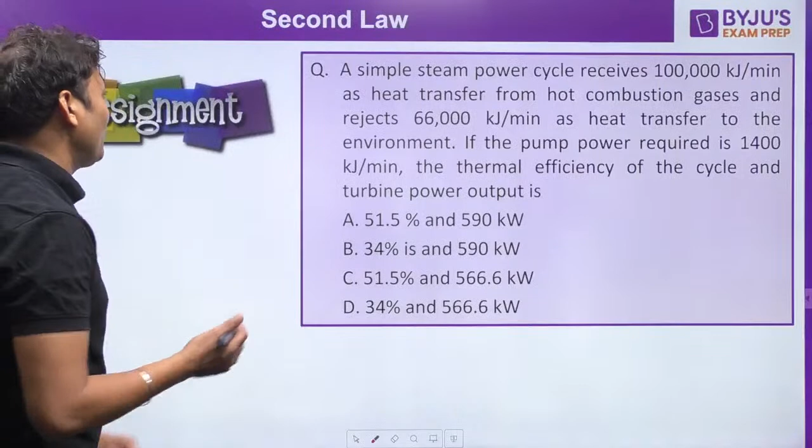This is your assignment question. Take the screenshot and give it a try at home. And the next class, that is on Wednesday, we will be meeting at the same time and we will discuss the very, very important and very complicated topic of thermodynamics, that is entropy, at 8 p.m. So do join me for the entropy as well.

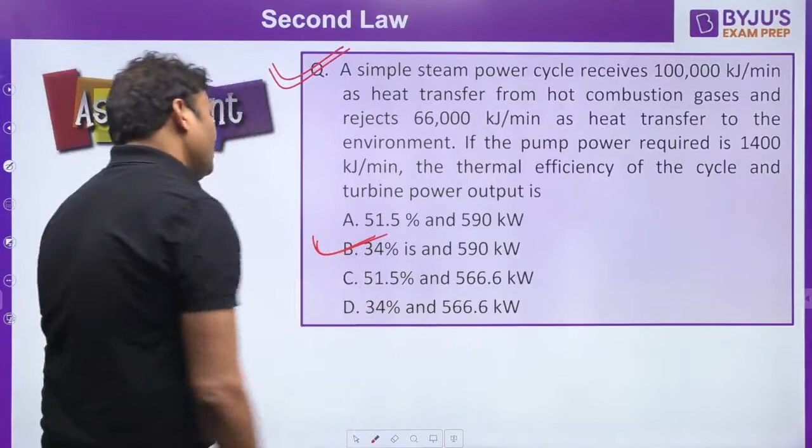And what is the answer? No, that is not correct. Let me tell you the answer for this. The answer to the question is option B. B will be the answer. Ashish, the answer to the question will be B.